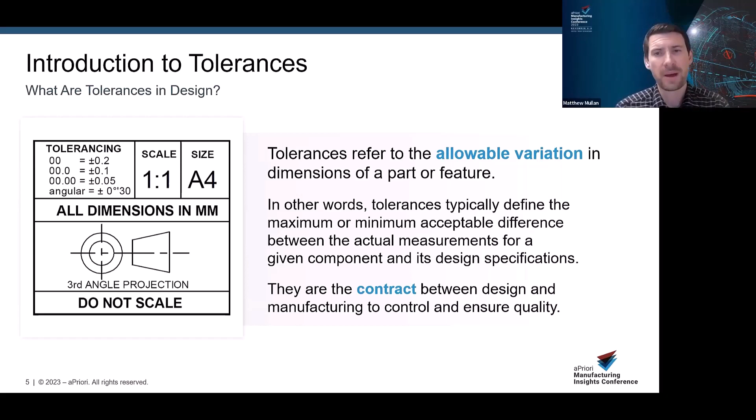Working with and applying tolerances in CAD models is critical for a robust design. As I mentioned previously, it plays an important part in a number of important roles. It ensures that the final product meets the quality standards required in service.

It specifies the dimensions to ensure functional relationships with other components can be met, that the component can be physically manufactured, and it also provides the information that can be used to control the tooling and the assembly interfaces that help with fitment in later assembly stages.

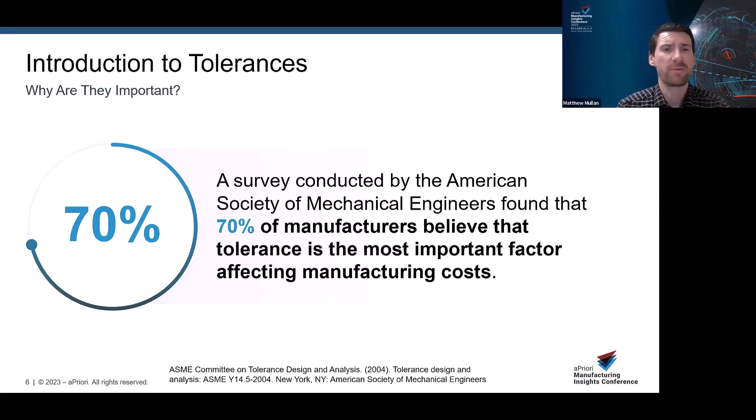A study conducted by the ASME showed that 70% of manufacturers believe that tolerancing is the most important factor that affects costs within manufacturing. So how does it affect costs? Well, the answer is not merely to apply more tolerances or tighter tolerances.

Tolerances not only drive quality, but they also drive the cost. And there's a band here where applying appropriate tolerances to meet the functional requirements of the component facilitates the manufacture of the component and the downstream assembly fitment.

For example, looser tolerances allow for greater variation in the part dimensions. They simplify the manufacturing processes, they require less precise equipment and labour. This can often lead to faster manufacturing processes because there's less emphasis on precision. It can reduce waste because parts with slight variations may be acceptable, and it requires less stringent quality control in terms of inspection and the associated cost of the tools in order to do that.

There may be times when a tighter tolerance is required, but having the knowledge that this will typically require more precise machining or manufacturing processes, which can increase production costs. More specialized equipment will be required for tighter tolerances, higher skilled labor, higher tolerance tooling. You may need to slow down the machining feeds and speeds of the manufacturing process in order to ensure this accuracy. These can all increase cycle times as more attention to detail and quality control is necessary.

There may be more material wastage because parts that do not meet the stringent requirements may need to be scrapped or reworked. And those tighter tolerances require more extensive inspection and quality control measures within the process.

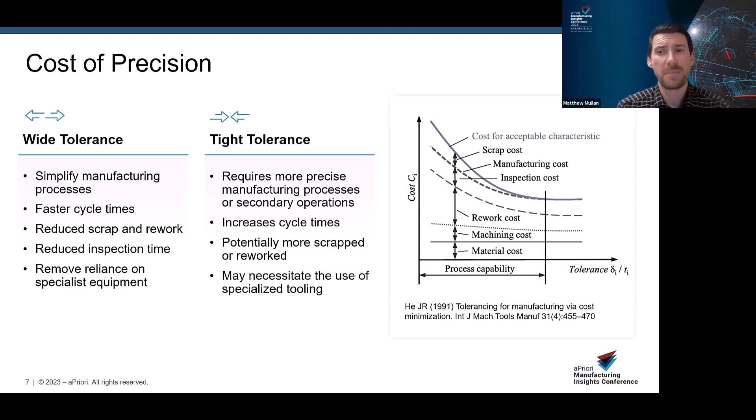If we think about how tolerance might dictate the choice of manufacturing processes available, we have to consider this along with a number of other decisions being made in the design stages. So I'm going to use an example of cutting a piece of rope, about 100 inches long. If I ask one of you to do this, it would be a relatively simple task. The experienced amongst us might even leave a few extra inches just to avoid cutting the rope too short, but it's a relatively straightforward process.

Think about what you would do differently if the exact length of the rope had to be within plus or minus 10 inches of that 100-inch limit. How would you approach the task differently? Maybe measure twice, use the table to lay out the rope.

What if I then disclosed that this was a piece of rope to be used in a high-tech application, and the length now needed to be 100 inches to within 1 inch? How would that change your approach?

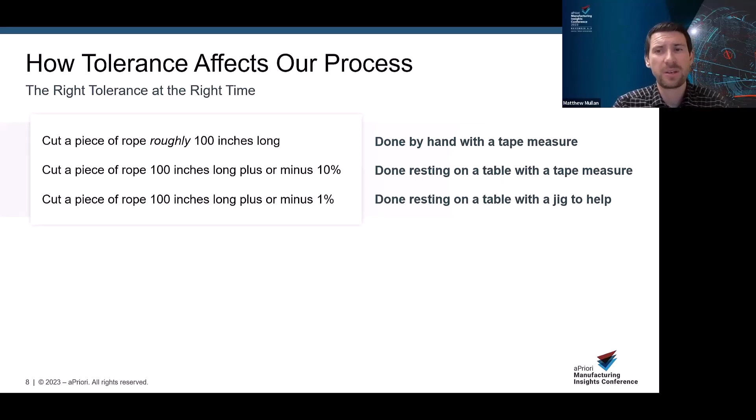We can add in additional factors here. If we want to scale this up into an industrial application and introduce more pieces of rope, maybe making 2,000 pieces, this again has another impact on our manufacturing choices and how we ensure conformity to different manufacturing tolerances.

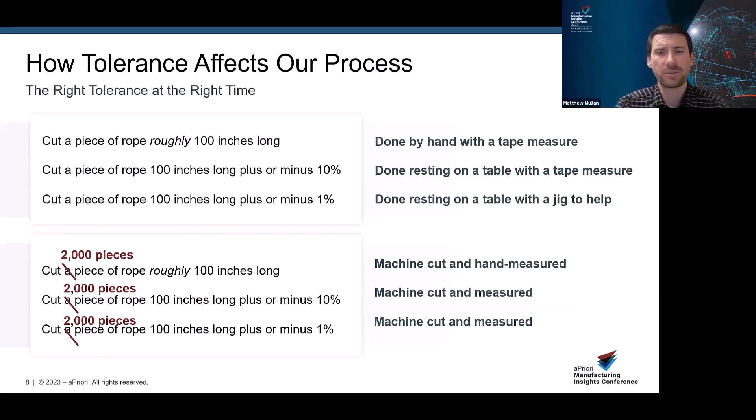But this is a balancing act. It's a trade-off between costs incurred now and potential costs incurred downstream. It's not the same for all parts. The impact of tolerance on manufacturing costs was found to be greater for smaller parts than larger parts, and greater for parts made of materials that are difficult to machine, such as hardened steels or titaniums.

The impact of tolerance on manufacturing costs was also found to be greater for parts made using complex manufacturing processes. These were all results of a study from the University of Michigan that showed a 10% reduction in tolerance could lead to a 20% reduction in manufacturing costs.

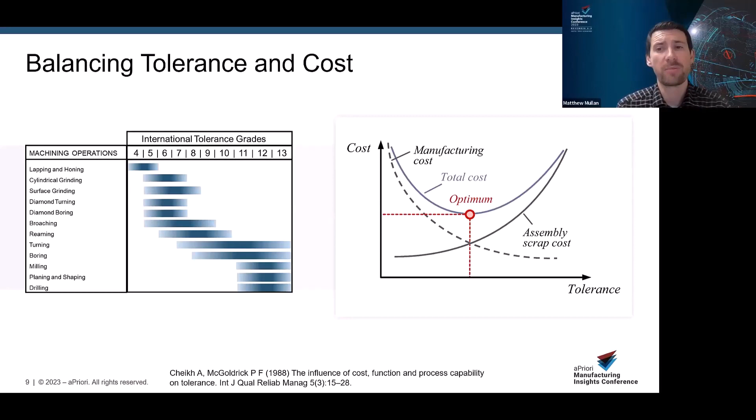So finally from me then, before I hand over to James, to summarize the importance of geometric tolerancing. Geometric tolerancing is an essential tool within the designer's toolbox for creating robust designs that are capable of being produced and assembled reliably, by identifying capable production processes, preventing later assembly issues, and minimizing scrap and rework.

By specifying the right geometric tolerance, companies can save time and money. By ensuring components conform to these requirements, future assembly issues can be avoided to ensure all parts fit together correctly. For example, a geometric tolerance on the diameter of a hole can help ensure the shaft will fit into the hole smoothly without binding. With the same application of tolerance, we can also have that same shaft and hole fit together with an interference fit, just by specifying different tolerances.

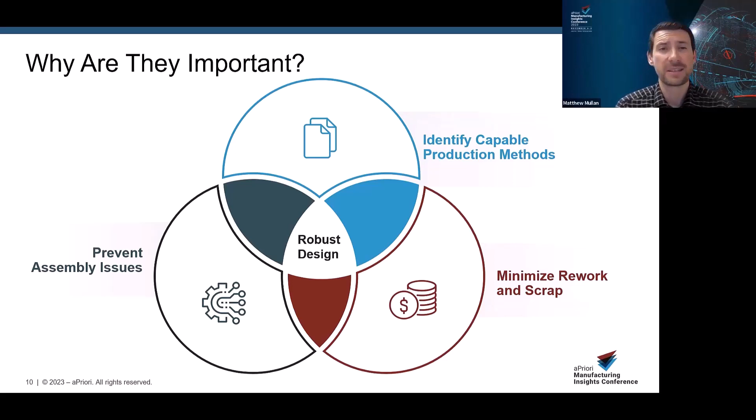So I'm going to hand over to James now to allow him to talk through the importance of identifying these at the design stages, and also how we apply it within APD.

Thanks, Matt. So Matt spoke about tolerances and why they're important, and I want to take a little bit of time to talk about what happens when we don't apply tolerances, and then move on to look at reviewing different ways we can apply tolerances and how APD might be able to help you.

Imagine, if you will, a world without engineering tolerances. It's pretty easy to do—just imagine a world where pretty much nothing fits together. If we take these simple Lego blocks, for example, if all we do is apply measurements to the nearest millimeter, then we're setting ourselves up for a world where a percentage of blocks won't fit, a percentage will be too tight, a percentage too small, a percentage too tall, and essentially nothing will work together. It'll make it impossible for customers to build Lego assemblies, let alone provide Lego kits.

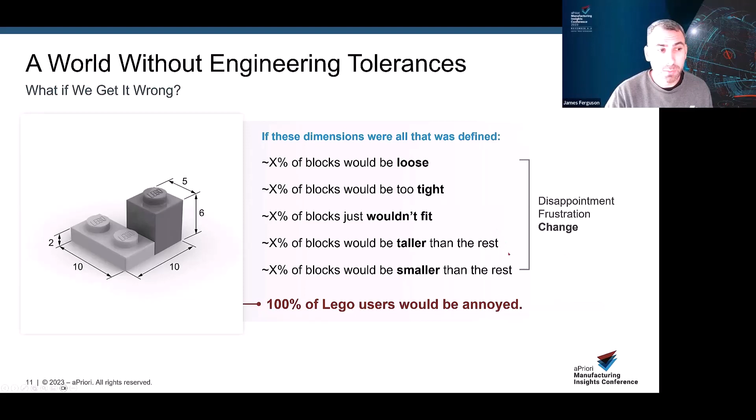Luckily for us, that's not the case, and Lego spends months upon months defining tolerances for even the most simple blocks, taking measurements, conducting FEA and Moldflow studies, theorizing and optimizing every last measurement for the best possible fit.

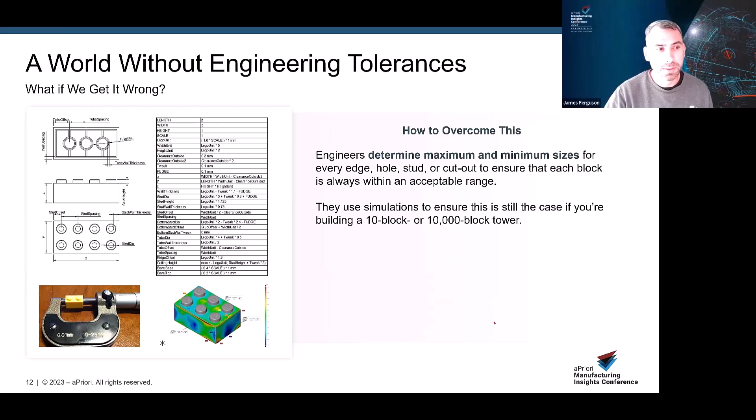It's due to this due diligence and effort that allows these small bricks to be used to build complex Lego assemblies. And it's the same principles of well-considered, well-applied design that underpin and enable the design of much more complex parts, systems, and assemblies.

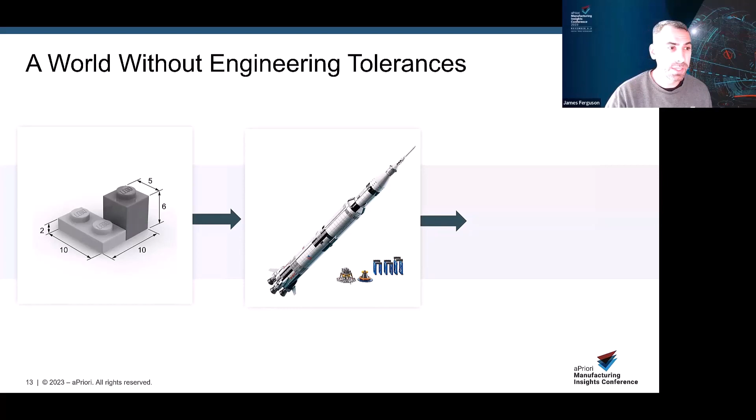How are tolerances specified? Tolerances are best applied during the design phase of product development, typically in three ways. First, and my favorite way, is through feature-specific targeted tolerance application, applied with careful consideration to 2D and 3D drawings.

Then through generic policy, whereby in the absence of adding specific tolerances, we can assume generic band tolerances correlating to the product's overall size, dimensions, and manufacturing route are applied.

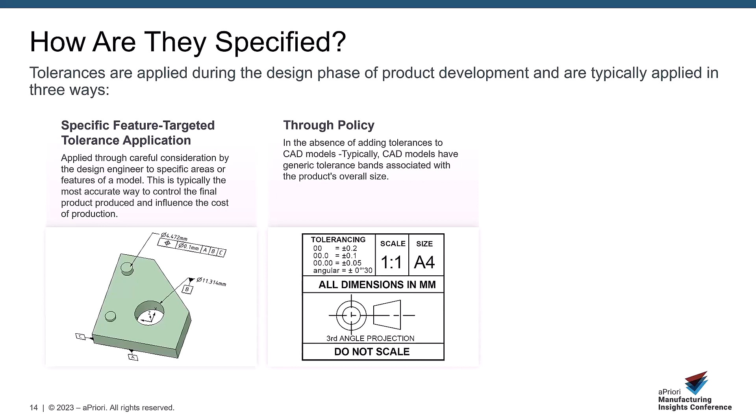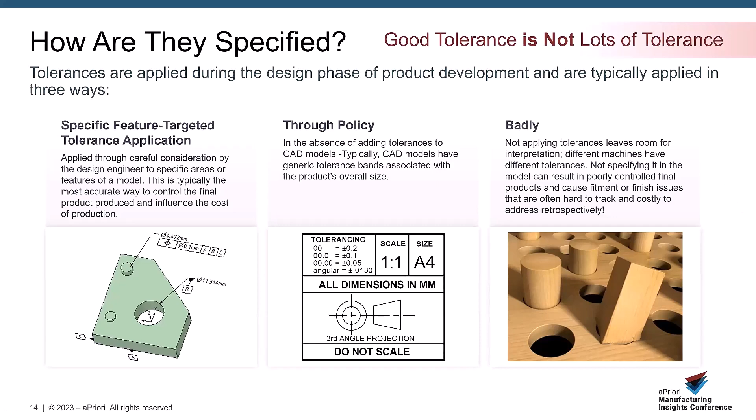And then sadly, we have the third way, which is the most upsetting way of all: badly or not at all. Not applying tolerances leaves room for interpretation. Different machines have different tolerances, and not specifying it in the model can result in poorly controlled final products causing fitment and finish issues. I'd also like to take this opportunity to bust the myth that lots of tolerance is good tolerance. That is not the case.

I'll now step through a really simple scenario where we can visualize the effect of tolerance. Taking one of our favorite parts, we can walk through what happens when we first apply no tolerance, then the appropriate tolerance, and finally excessive tolerance, and understand the impact.

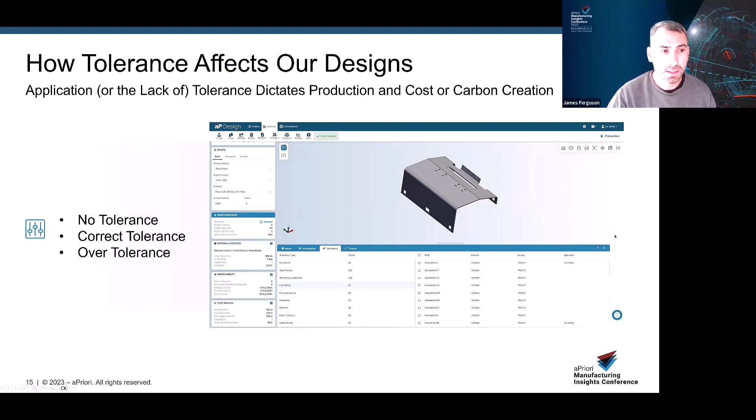Firstly, no tolerance. Let's call this the baseline for cost and cycle time. The part appears to be producible, but we can't ignore the effect the lack of dimensional control is going to have. It will be unpredictable and ill-fitting when paired with other mating parts, and it will most likely incur rework or rejection.

Then, when costed with the appropriate tolerance, we can see that we can maintain production with the same machine as our first routing, albeit with a few minor corrections. A slightly higher cycle time resulting in a small increase to the cost, but delivering a well-controlled, accurate part, ensuring repeatable production and assembly, is a price I'd be willing to pay.

And then lastly, let's go wild. Let's apply all the tolerances we can think of. This tips the scales and incurs a raft of additional specialized tooling and dramatic cost and cycle time increases, and still results in high scrap and excessive costs. Arguably, it's just as bad as applying no tolerances at all.

The key takeaway here is that when we're careful and considered in our tolerance application, the impact to our cost and cycle time doesn't need to be huge. In this case, with less than 1% increase when compared to no tolerance, it's going to result in a much more efficient and exponential return in costs in terms of cost avoidance.

Tolerance really is a bit of an art as much as it is a science. APD has DFM guidance built in, specifically aimed at alerting you to issues caused or related to tolerance. However, I'd also like to take the opportunity to walk through some of the key features introduced this year.

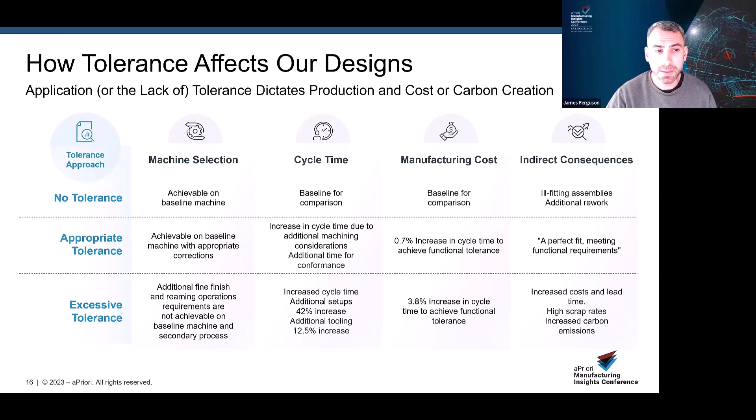Firstly, and obviously key to what we've been speaking about today, APD lets you add and edit tolerances directly in the application, letting you choose features and faces to target and doing some of the mental maths like filtering out unsuitable tolerance types based on your features selected.

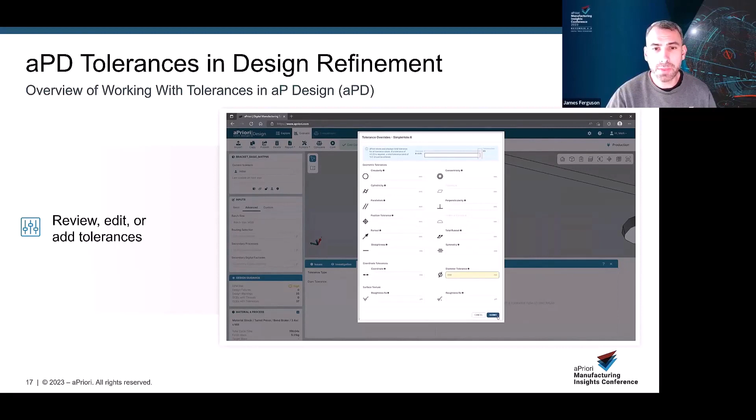APD also supports tolerances being imported directly from CAD through PMI and the application of a CAD tolerance policy.

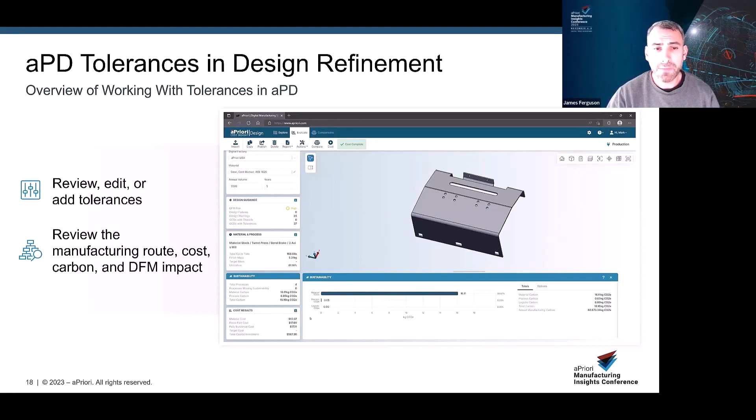Next, as you add and edit the tolerances in APD, we provide you with detailed cost, carbon, and DFM feedback to let you understand how your decisions will ultimately affect your design.

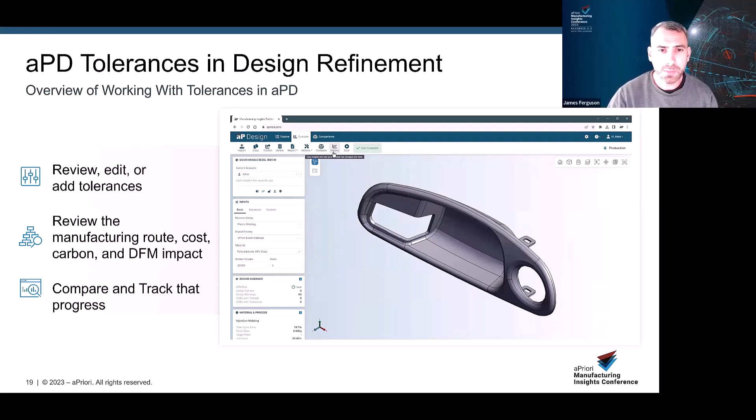And as of this month, and I must admit this is one of my favorite features, APD will let you see and track the progress you make as you iterate through design revisions, and allow you to plot on a biaxial graph a combination of over 12 outputs, including, for example, cycle time versus cost, total investment, or carbon. I think this is one of the best views to understand at a true engineering level the impact of our decisions on the design, and how it can shape the journey that our part assembly undergoes during this design refinement phase.

And finally, as of September, APD lets you build and save comparisons, showing a customizable and detailed breakdown of how each scenario stacks up against each other in order to highlight or justify final design selection.

All these tools and many more form the backbone of APD, built and informed by design and manufacturing engineers, to be used by design engineers to help make your products the best they can be. Thank you very much.